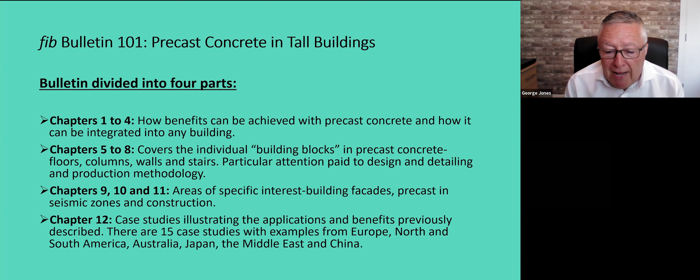There was particular attention to connections in this area, which is often one of the things that people ask about in relation to tall buildings and precast concrete. In chapters 9, 10, and 11, we then looked at areas of specific interest, and those areas that we chose were building facades, precast in seismic zones, and construction of precast concrete in tall buildings. And finally, we finished with 15 case studies, and we tried to draw examples from throughout the world, and we have examples from Europe, North and South America, Australia, Japan, the Middle East, and China.

So going back to the various chapters in the bulletin, chapter 1, we looked at the characteristics of tall buildings. They generally have a small footprint due to the high land values where they're built and the restricted space available. They tend to have a repetitive layout above the lower levels, giving rise to repetition of form and so on. There is an increase in the relative magnitude of lateral loading due to the tallness of the building compared to gravity loads. And there is great importance in vertical service cores for purposes of structural stability, not only for the cores themselves, but the structural stability that lends to the building, and as a fire escape, which is extremely important in tall building design.

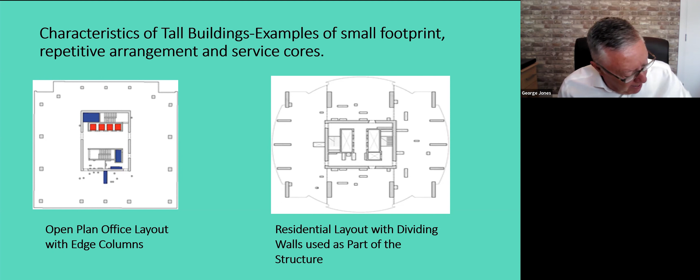On the right-hand side, you can see a typical arrangement of a residential type building where areas that are accommodated by walls and so on can be used as part of the structure.

This gives engineers a challenge in that they need to then develop efficient and innovative structural systems that minimize this cost premium, but also satisfies the building's performance requirements.

Now, what are these essential components? Well, each tall building requires its cores, which take up a large proportion of the floor area and include stairs and landings. They also have floors. They also have other vertical components supporting those floors, columns and walls, and they also have a facade. These are essential components in buildings of this type, and all these components can be provided in precast concrete.

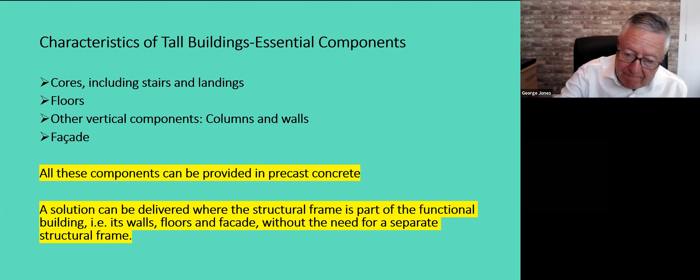Chapter 2 of the bulletin looks at benefits of precast concrete in tall buildings. And we all know that there are great benefits in concrete itself, whether it's precast concrete or in situ cast in place concrete. It has high quality and low maintenance, great fire resistance, strength, temperature control and insulation, acoustic separation, durability, visual flexibility and sustainability. We all know of these properties.

However, in precast concrete, there are extra benefits that can be achieved. These benefits are reduction in floor cycle time. I expect Mischa might talk about that later, where floor cycle time becomes critical in tall building construction. And this is the time taken to construct a single floor and supporting vertical elements. The increased time certainty and improved completion dates. Again, weather, climatic effects, and so on, don't affect precast concrete, which is made off-site.

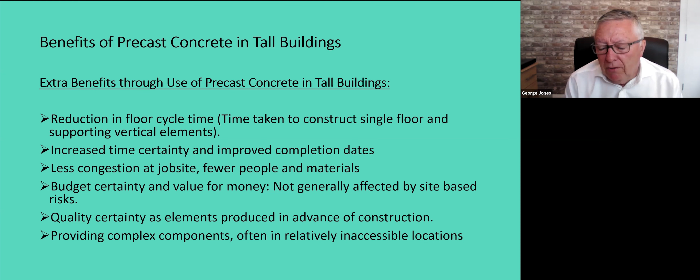There's less congestion at the job site because the concrete is made off-site. Then all you need are a few people to erect the concrete and complete the connections. We should have budget certainty and value for money because the precast concrete is not generally affected by site-based risks. There should be quality certainty as elements are produced in advance of construction. So elements can be inspected and it can be ensured that the quality required in the building is achieved at the factory and not left to be inspected on site after removal of shutters and so on. And complex components can be made off-site, and often there are relatively inaccessible locations at high levels that cause difficulties in cast-in-place concrete.

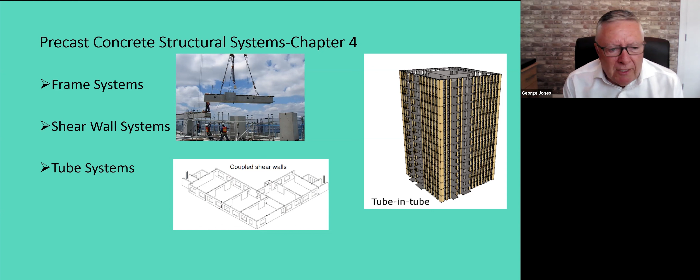In chapter 4, we have precast concrete structural systems. Dick van Keulen will be talking about this in more detail in the next presentation, but generally these can be split into 3 areas: frame systems, shear wall systems, and tube systems.

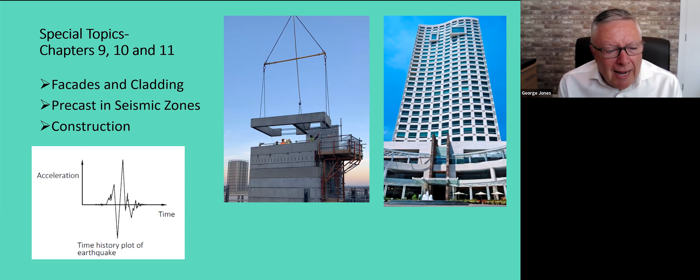The Conjunto Paragon, Mexico, is an award-winning precast facade. Again, in the USA, another precast facade at the Northwestern Memorial Hospital. The Erasmus Medical Center in the Netherlands was a full precast frame with a novel way of constructing that frame, which Mischa will discuss later. The Paramount in the USA, a full precast frame in a seismic zone using post-tension technology with precast elements.

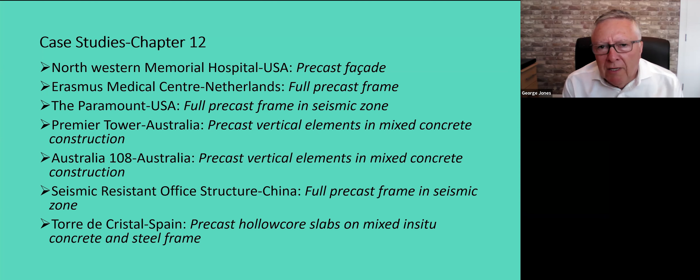So that gives you an introduction and hopefully a flavour for the bulletin itself. We now have 3 specialist presentations, and I would like to hand over to Dick van Keulen, who will talk you through precast concrete frame systems. Thank you.

Thank you, George, for introducing me. My name is Dick van Keulen. I'm from the Netherlands. I'm the founder of an engineering office, and we are specialized in design and engineering of precast concrete building structures. Apart from that, I'm doing research at Delft University in the field of precast concrete.

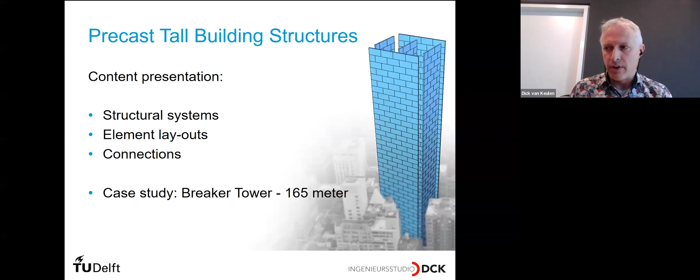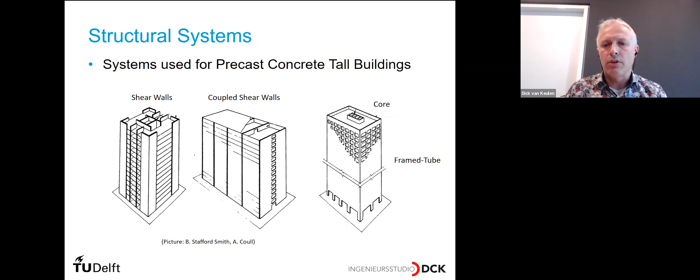When we look at tall buildings, then we have a mixed type of structures, and that are 3D structures. For example, a core with the elevators and stairs, but also the facade is able to be part of the structural system. Here you see a framed tube structure. It has openings, and this frame structure is able to transfer the forces to the foundation of the tall building.

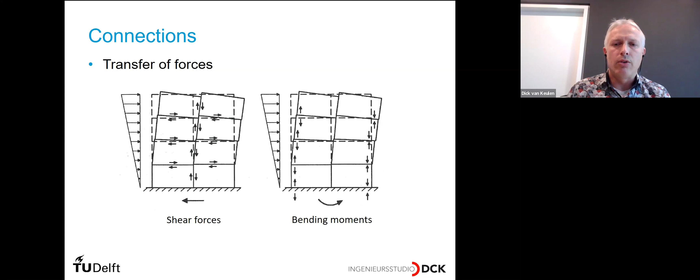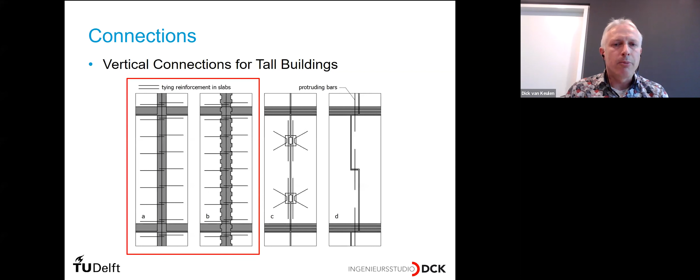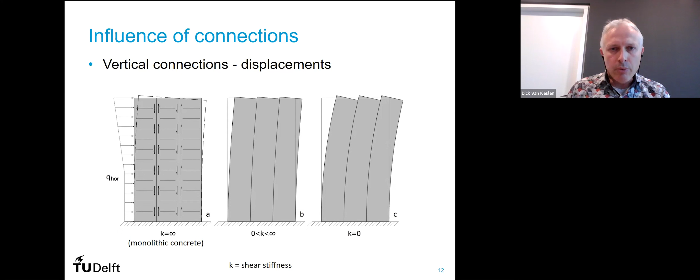And the precast concrete shear wall structure is depicted in the middle. And then the shear stiffness of the connections is in between the infinite shear stiffness and the stiffness of a shear wall without connections. And this has to do with the displacements, which are very important for tall buildings. But what we have as well is the force distribution. And what we see is that the precast concrete vertical connections weaken the shear wall a little bit. But the force distribution also changes a little bit, and the structural engineer has to cover this.

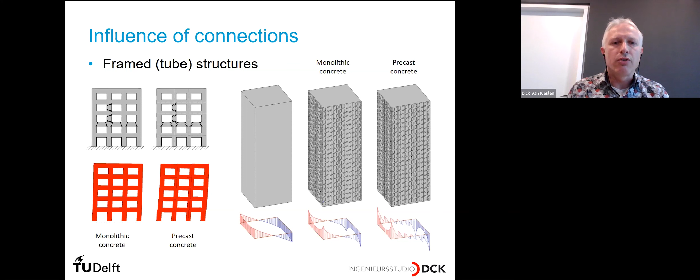I was also asked to present the Breaker Tower in Bahrain. This is the second part of my presentation. This is a 165 meter high precast concrete building. It was completed in 2015, and at that moment it was the tallest fully precast concrete building in the world.

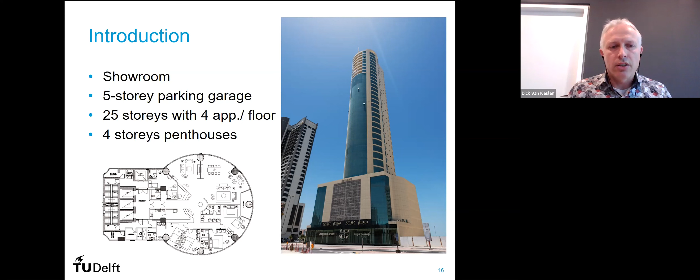This building has a showroom on the ground floor. On top of that there is a parking garage, and in the high-rise part of the building there are apartments and penthouses. And as you can see in the plan of the apartments, they have a very open space, so you have a good outlook to the surroundings. And structurally, the backbone of the tower is situated at the left, at the back of the building.

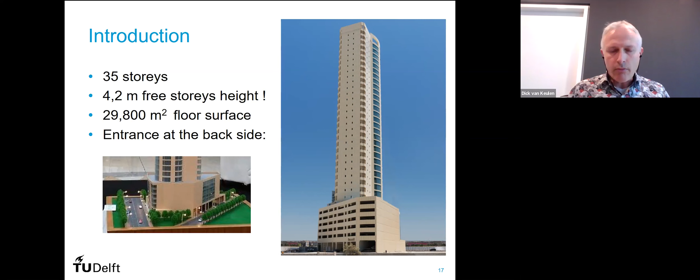This building has 35 stories, and that's not a lot for such a high building, but that's because of the 4.2 meter free story height, which is part of the luxurious environment over there. They give the resident a lot of space. Then I would like to go into the precast concrete components of this building.

At the front side there's an open structure with columns, and between the columns there are inverted T-beams placed, and they used hollow core slabs for making the floor, placed on the T-beams and also on the walls. What you can see here is the round circle. That was difficult to make with hollow core floor, and they chose to apply a cast in situ round shaped cast in place slab. That's what they make there to make the apartments with an overview.

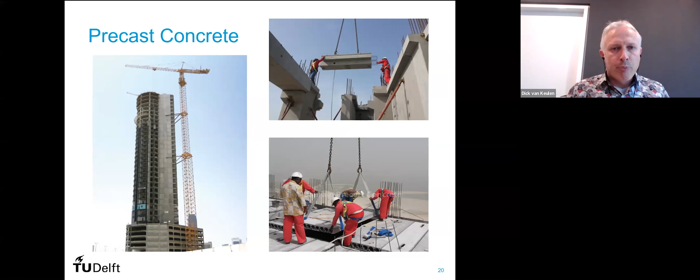On the left side, you see all the walls, and they are all shear walls. They are coupled together. Here are some pictures of this building. In the left one, you see the shear wall at one side of the building. This is the back wall of the building. Here 4 precast concrete elements are connected per floor, connected to one another. They make inner spaces where they put in cast in place concrete in order to connect the 4 wall elements together so that they form the entire shear wall structure.

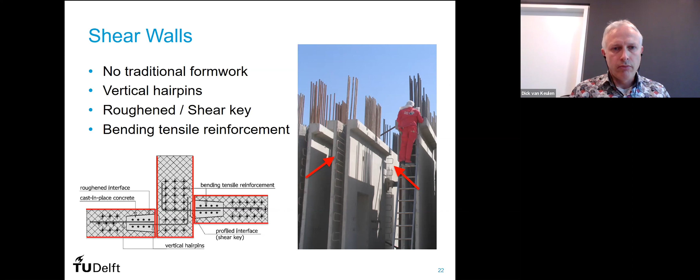It's also important to have a solid diaphragm action. What you can see here is that over the precast concrete wall, there is a cast in situ space where they make the tying reinforcement, and that's available on top of every precast concrete wall element, and together they form a very solid, stiff in plane slab.

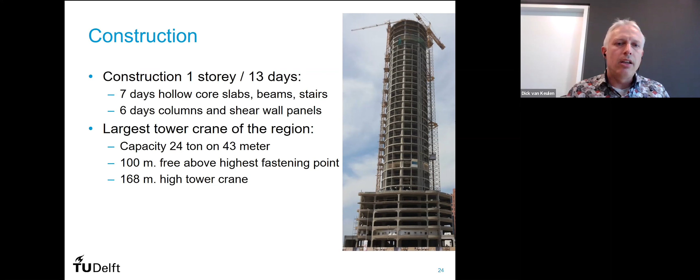Then a few words about construction. The construction took 1 story per 13 days. Of course, they started with more days per story, but at the end they did it very fast, and they needed the largest tower crane of the region. So this was my presentation. Thank you for your attention, and I would like to hand it over to Mischa Falger.

Thank you, Dick, for your introduction into the way of constructing and aspects with that. I'm talking about actual construction of the buildings from a constructor's or contractor's point of view. My aim is, in the limited time I have, to give the audience a little taste of how a contractor looks at a tall precast building. After introducing myself and the company I work for, I also would like to make a link between how you construct a building and what impact that has on the design. And of course, I would like to tell you a little bit more about some of the projects.

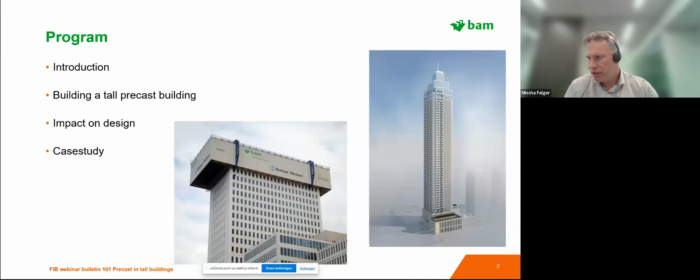In fact, all 3 buildings Dick showed in his first slide are in Rotterdam and are built by the company I work for, which is BAM. BAM is the Netherlands' largest contractor, and also has a strong presence in wider Europe. We are doing projects in 6 or 7 countries on a regular basis, and we are involved not only in building buildings but also in infrastructure and everything which you would expect from a big construction company.

As a person, I'm a structural engineer by education, and I've worked most of my career for BAM as a contractor, but with a structural mindset. And what we try to do in our office is to come up with smart solutions and optimize designs so that BAM is enabled to build those buildings efficiently, and therefore is competitive with other colleague contractors.

When a contractor looks at precast tall buildings, a few things come to mind. Of course, safety. Safety is very important to a construction company. Of course, in precast tall buildings, precast is an important part. The fact that the building is tall is an important thing. Logistics is always something to think about, and time on most projects I've worked on in my career is of the essence. So I'll go into those five aspects in a little more detail.

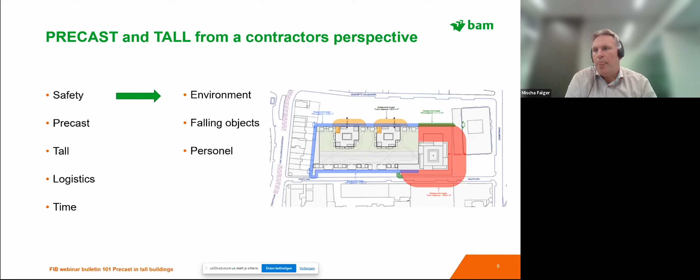The picture shows some safety zones around buildings. The blue one is part of the project, which is less tall. The red one is the increase of safety area you need around tall buildings. So the fact that a building is tall has implications for safety and the way we look at that.

George gave a good example and a good list of reasons why precast is an interesting way of building buildings. As a company, we like precast for several reasons. The quality, as mentioned, is a big part of that wish to build precast. And if we do so, we focus on things like element size and weight, the way connections are designed and need to be applied in the building, and of course also transport of elements and the way they are positioned in the building. Typically, you need to take all those factors into account to come up with a solution which is actually buildable. I will make a reference to that later on in the design part.

But all those aspects of precast are very important to a contractor, because the combination of those factors actually makes a project work or not. And I think that is an important thing to remember when you are a designer. Many times we come across buildings which are very suitable for precast construction with all the benefits that come with that, but are designed as an in situ concrete building. And to make that step, especially for a tall building, from in situ to precast is a big leap, and something a designer really should be focused on.

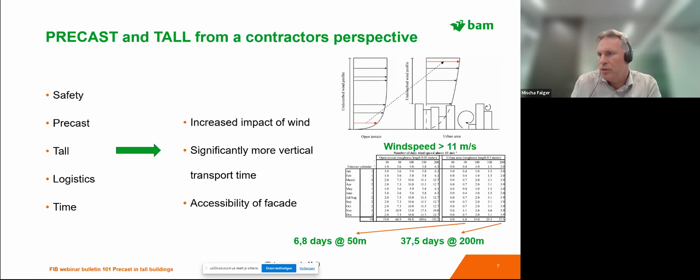From a logistics point of view, high-rise buildings are often located in the city centers of big cities, which almost by definition means that you have a very small building plot, that the access to the building site is limited, and that all the work you have to do, building a very tall building, has to be crammed into a small area. This particularly is of interest to a contractor because that actually means that you have to organize your building sequence and all that sort of things in a completely different way than when you can build the same volume of building over a spread out area.

So from that point of view, the fact that the building is tall and always in the city center is something to keep in mind. And George already mentioned cycle time. The time you need to complete one floor is something which is very important to a contractor, because once you get into a rhythm of precast, you need to make that cycle every week to keep up with the time schedule of the total project.

Well, if you have a building which is tall compared to a regular size building, this vertical transport is getting a big impact on your cycle time. Typically, we try to get a floor done every week. That is something which suits our company and our suppliers and the way of thinking in our country. But you can imagine that if you have to transport an element, let's say a facade element, in a vertical way, using cranes, this takes about 5 minutes up and down for a building which is 50 meters tall. But as soon as you get to the 200-meter limit, you need almost 20 minutes to get it up. Well, that is something which is of significance on this cycle time.

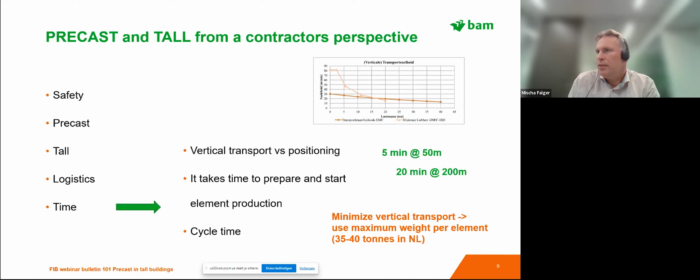Coupling those issues to what you can do or need to take care of when you are designing a building is that element size and weight actually matter. If you are trying to maximize your weight so that you minimize the number of vertical movements, it means that you have to adjust the element size, because at the bottom of a high-rise building, the wall thickness typically is thicker than when you go to the top, which means that the other dimensions of the element at the bottom stories need to be smaller, since you have a fixed weight limit. That is something which has impact on the structural behavior of your building, as Dick illustrated. So from a design point of view, this is something to take into account.

Also, the connections, wet or dry, are very important. Stiffness is a key factor in designing a tall building. And from a contracting point of view, we have preferences for certain types of connections, because some of them are easier to make than others. Take, for instance, welded connections. Typically, because of the internal finish of the building, the designer would like to make those connections on the outside of the structural elements. Well, try and do that with welding equipment at 150-meter height on the outside of the building. That is really something we are looking at. So connections and the way they are made and positions in the building are of significance for the construction sequence.

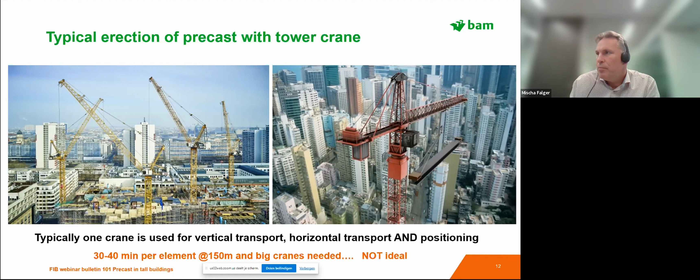In the bulletin, there's a case study about the Erasmus Medical Center, which is a 100-meter office tower with a prismatic floor plan, and I think that's important to be able to use this type of construction method. The building was completed in 2016. And by using this self-climbing assembly hall, we were able to disconnect the vertical transport from the horizontal transport on the site and the positioning of the element, by using two separate cranes for that.

These two are independent, and you only need one crane to get all the material up into the building, and you use the other one for positioning and transporting horizontally. And this usually decreases the impact of the height of the building. The cycle time can be the same as long as your vertical crane is able to get all the elements you need up there as fast as needed.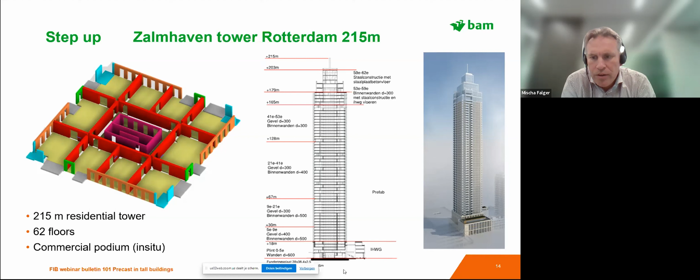And by making this part in situ, you also buy time to start producing the elements you need for the higher floors, because once this self-climbing assembly hall is going at 1 floor per week, you need more elements than the factories can produce in 1 week's time. So they need a head start to start producing the elements, so that once you start using your assembly hall, they can keep up with the demand.

Well, this building has a standard floor plan, which is square. Indicated are the green lines, which are internal walls, and the red lines are parts of the facade, which are actually load bearing and also part of the structural system. In basis, every element in this building is made from precast concrete, except for an in situ floor topping.

And the reason for that is that in our country, the Netherlands, it's quite common to put all services for apartment buildings in the floor. So all the air ducts, all the wastewater treatment, all that sort of installations is in the floor. And it's very impractical and almost impossible to do that at this scale in a fully precast element. And also because it's a very tall tower, there are special requirements for robustness, which are easily met or more easily met by putting on an in situ topping. So basically, half of the floor thickness is precast, and the top half is cast in situ.

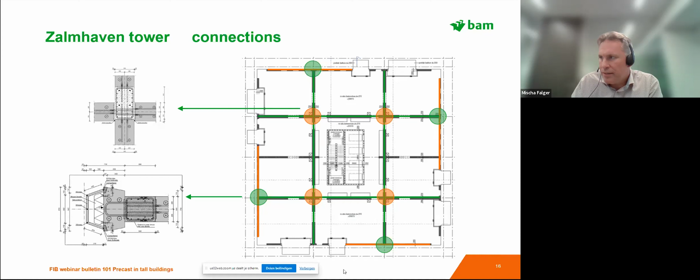And to enable the walls to work together as one structural system, we have different types of connections between internal walls and between the walls and the facades. All those connections are wet and are of the type as described by Dick earlier. But from a construction point of view, it's something we spend a lot of time on, to actually get that right and to get that into the sequence in a correct way.

Well, the end of my presentation is to show you a little bit of what this self-climbing assembly hall actually is. Basically, it's a big factory on top of the building. In that factory hall, there are two big gantry cranes, one for getting the elements from street level up to the level you're constructing, and the other one is for picking up that element and transporting it horizontally and positioning it at the right position in the building.

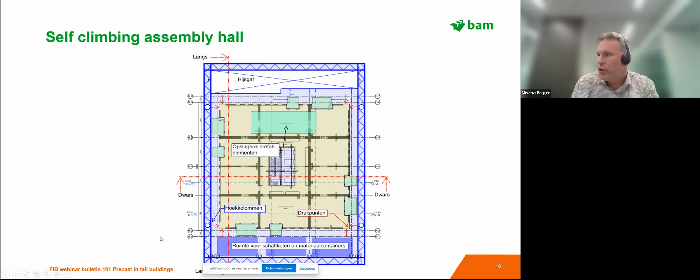If you look at this plan, there's a big hole in the assembly hall which enables the elements to come up. There's a position in the middle, which is a position where we can store elements that are to be placed later on. The whole factory has also containers and amenities and all that sort of things for the people working in this hall, so that they don't have to go down during the working day. In itself, it's almost a factory when you look at it.

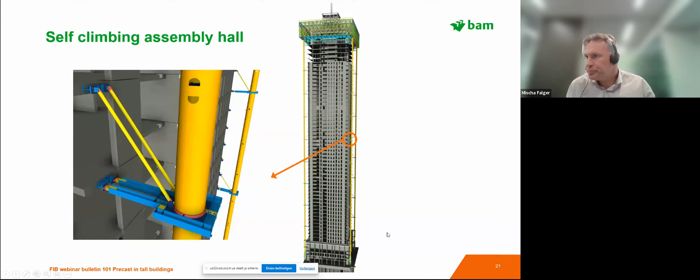And since pictures can say more than words, I would like to end this presentation with two time-lapse videos. The first one is about jacking the system, because every floor you have to push up your assembly hall by one floor, and that is done at ground floor level, so that everything is at an easily accessible point. And the second time-lapse video actually shows a one week cycle of constructing one floor.

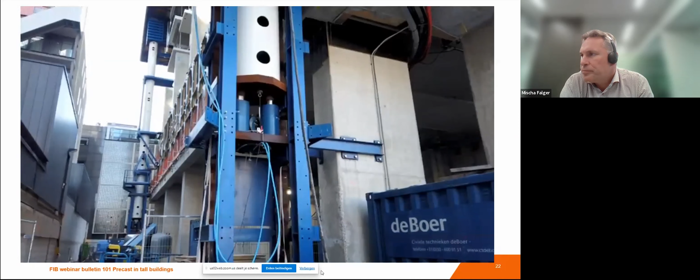Once the system has been pushed up one entire floor, the white legs are supported by the blue support structure. The jacks go down, and we insert a new white element, a new tube, and then you can do the whole exercise again for the next floor. And well, this time lapse gives you an idea of one cycle, how we complete one floor. In total, 82 concrete elements are installed within that one week, 5 days of work of an average of 10 hours per day.

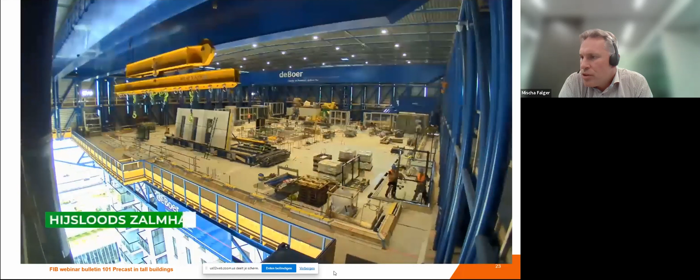You can see the elements come up on the left-hand side of this picture. They are positioned in the storage area until the second crane can lift them up and position them in the right position. You can also imagine that it's impossible here to switch that sequence, because there's no room to actually take elements across other elements which are already in place.

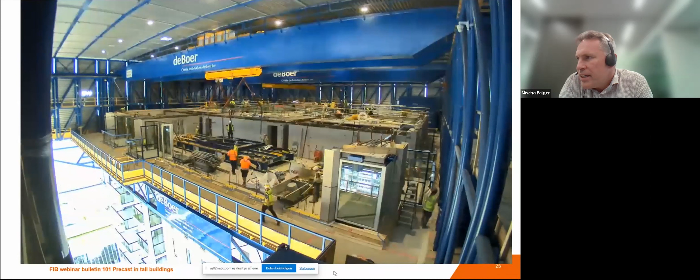And in this way, in 42 months, we have constructed the tallest precast building in the world currently.

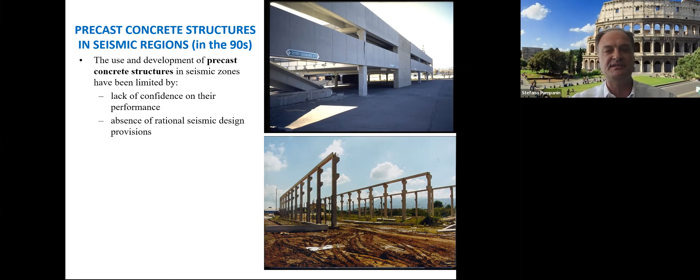It's not a problem of the material, it's a problem of connection design, a problem of conceptual design, and generally speaking, a problem of lack of rational seismic design provisions. You do not have a code. You don't learn precast, pre-stress and post-tensioning at school, at university, so you are in trouble. So in the 1990s, precast in seismic regions was adopted, but with quite major restrictions.

The restrictions were: you could use an emulation or cast-in-place approach, the famous wet connections, or you could use strong connections, provided that the inelastic demand due to the earthquake was not accommodated within the connection between precast elements. The novelty became, after the 90s, this jointed, dry, ductile connection. That's what we want to discuss in these very few minutes.

It's not anymore an issue of life safety. If we're thinking about seismic design, we are obviously targeting life safety, but it's not enough. If you take an industrial building, the cost of the contents, like the Parmesan cheese in Italy in 2012 damaged by the earthquake in some industrial plants, was much more than a few times the cost of the skeleton of the building. Obviously, if you get a full collapse, we're talking about a different issue, but we should be able to design for no collapse or low probability of collapse, and life safety.

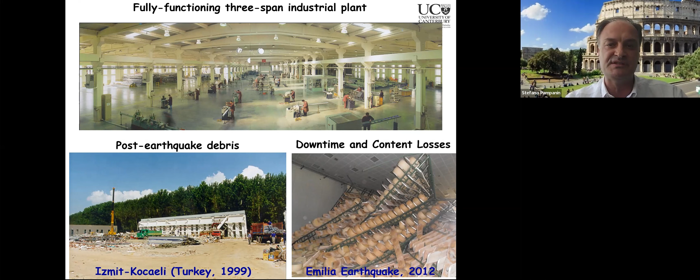The interruption of the production of such 24/7 industrial plants is going to be, in a few weeks, much more expensive than the whole structure itself. So we need to change gear. What are the key parameters or key aspects in seismic design of precast?

They're not that different from other structural materials, but they are more important because you don't have the opportunity to go on site and fix. But this lack of opportunity to go on site and fix is actually what George was very properly saying is a benefit, a lack of surprises, or let's say in a different way, lack of risk on site, because things should go as right as they can, from quality-controlled manufacturing to delivery on site to the erection. And Mischa was showing how extremely high technology can be adopted to develop the full system.

So we need a conceptual design. We need to discuss very properly what is the lateral resistance system. We need then to think about the design methodology, force-based versus displacement-based. I can tell you right away, it's time, even for very tall buildings, to consider seriously using displacement-based design, possibly in combination with force-based design. But we need, first of all, to limit the drift. We need, first of all, to limit the displacement. And it's much easier if we start from the beginning from a displacement-based design point of view, even in a low seismic region, or even in a wind-governed type of design.

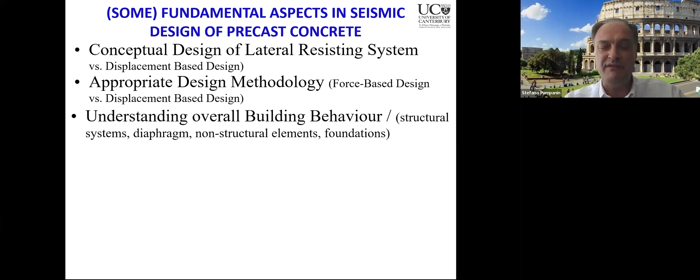We have to understand the overall building behavior, which means structural system, diaphragm, non-structural elements, foundation, or the whole building blocks that you will find in the bulletin, which is going to discuss these issues or systems, but we need to make it work properly all together, which means displacement compatibility. The precast stairs need to be able to slide as part of an isolated component, like in a base isolated building. The diaphragm needs to do a proper job. The taller you are, the more higher modes you're going to introduce. So you need to be very careful in designing and detailing, here it is, detailing the connections between elements and the connection between the skeleton and the non-structural system.

Redundancy and robustness are extremely important. With the same care that we think about preventing progressive collapse during construction, we should be preventing progressive collapse in the seismic response, so in the seismic zone during an earthquake, in the aftermath of an earthquake. So it's fundamental that the structural designer considers redundancy from the beginning and robustness from the beginning of the design.

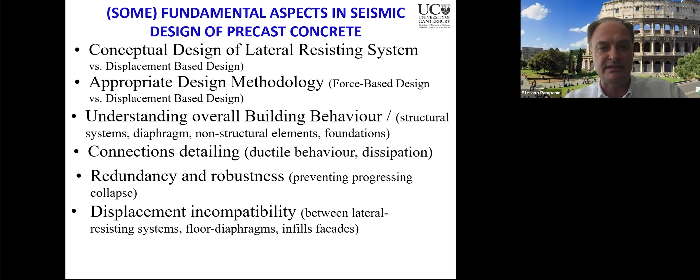Incompatibility of displacement: someone doing something, someone else doing something else. Think about a tube-in-tube, a dual system with core walls and frames, or core walls and outrigger, or outer walls and core walls and outrigger, using tension and compression to try to give you more balance. The whole incompatibility of deformation between one system and the other, between the floor diaphragm and the lateral resistance system, must be taken into account. Last but first, detailing.

Devil is in the detail. In any structural design, we should not forget that detailing is going to be the one saving the building, especially when we're thinking about seismic design. It's not the colorful type of output that you get from your computer model. So let's use the computer model as an assistant, but the conceptual design is the one that, from the very beginning, is going to drive the proper design in the proper direction, and detailing is the one that is going to confirm the proper conceptual design in terms of behavior. Our computer model should be a verification.

So the idea of, you see here, I didn't put design methodology first. You don't get started with try and see. So it's not a design by analysis, but it's a design as a conceptual design, and then the verification comes with the analysis. We will not be talking about this type of buildings.

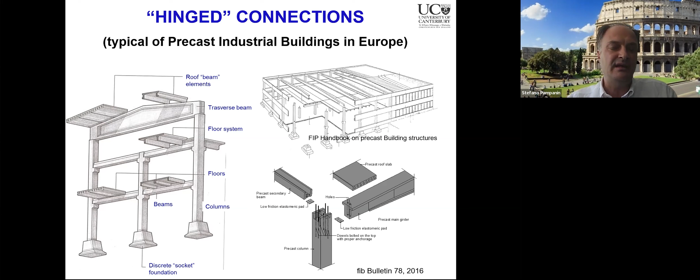There is a prejudice. People think that precast concrete, especially in Europe, is for industrial buildings with this sort of strange connection, simply supported beams on columns, with big corbels, maybe a couple of dowels, socket foundation at the base, and everything which is very far away from a moment-resisting connection. If we are talking about precast construction around, not the world, but just going northern in Europe, central north of Europe, you saw what precast concrete is actually capable of doing, and it is far away from simply supported or hinge type of connection. We do need, for seismic design, moment-resisting connection.

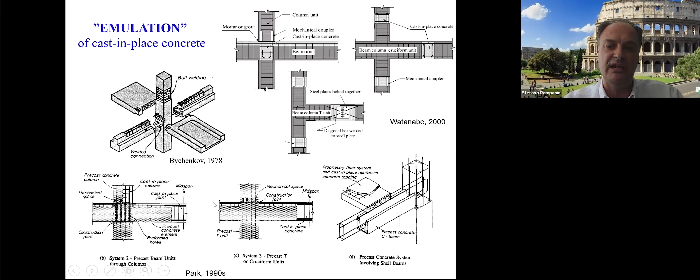So in the past, moment-resisting connection, and in the present, is well developed using wet connection. You have semi-precast elements which are going to be connected in a monolithic emulative way by casting the wet connection. You can have cruciform joints, you can have T-shaped joints, you can have shell beams, and you can find more information in the fib Bulletin 78, which has been led by a great engineer and academic and friend of all of us, Spiros Tsoukantas, who is not with us anymore, passionate about precast. He pushed very hard for this bulletin to be able to be completed. And you can find there some basics of step-up construction, of emulative approach, as well as the dry approaches that we are going to refer to, with shell units and so forth.

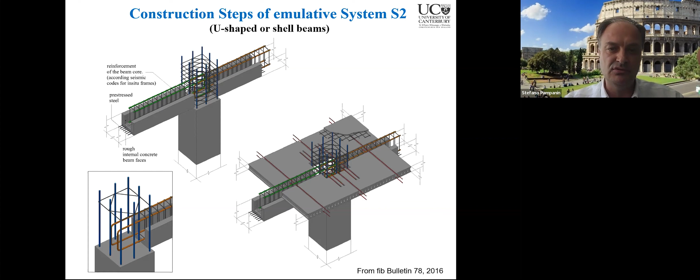All of this, just to make sure, can be properly done for tall buildings in seismic regions. But there's a but. There are examples from India, there are examples from Japan, there are examples here from New Zealand with cruciform joints. But if you're doing semi-precast, so if we are half precasting, half casting the connection, we are not exploiting the advantage of precast concrete. It has been mentioned very clearly, if you want to go fast and quick, if you want to have full control of the quality of the manufacturing, you want to do all the job in the yard, all the job on your desktop, on your computer, and the construction should be as simple as possible.

It could be complicated from the point of view of tallness, could be complicated from the point of view of speed of erection with dry elements, but you don't want to increase the complexity of the connection as you're typically doing with semi-precasting. So what I just showed to you is absolutely usable for tall buildings in seismic regions, but we are going to a new era. The new era is saying that in seismic areas, we don't want to have damage. We want to have life safety, but we don't want to have damage. We want to have damage control. How can you get ductility without having damage?

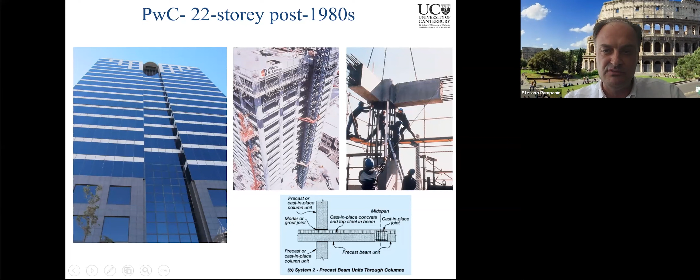And an example of the good old way is this 22-story building. PwC, PricewaterhouseCoopers, is a 22-story building using a cast-in-place emulative approach in New Zealand. It got hit by the earthquake in 2010-11, specifically on the 22nd of February 2011, and it showed an amazing plastic hinge, the best ever seen plastic hinge in a beam. The joint and the column are well protected by capacity design, so you are going to have the weakest link of the chain in the beam, but we don't know how to repair it.

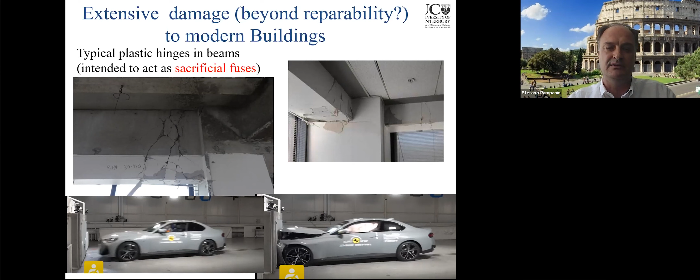In a way, I just gave a presentation in the Senate, in the Italian Senate, explaining what it means, the next generation of seismic protection, and explained that what you see here in terms of plastic hinge in a beam is what you see in a car, exactly what we are accepting or expecting from a car, to plasticize itself to protect the pilot, to provide life safety. So the building does deliver life safety using an emulative connection, by plasticizing the beams versus the column, but at the end of the day, we don't know how to repair it.

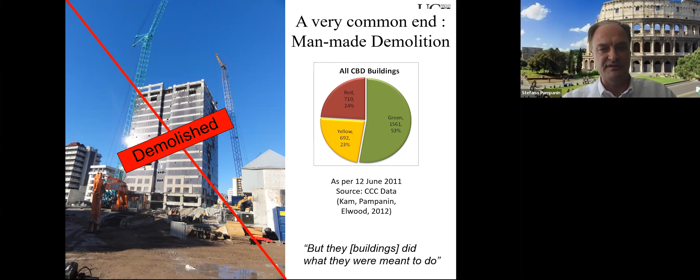So a big issue in terms of resilience, community resilience, and sustainability of a city is this. That's the picture of Christchurch, the city in New Zealand, which was hit by a sequence of events in 2010-11, and the reconstruction of the city had to become safer and, let's say, more resilient. Number of fatalities, 185, a lot.

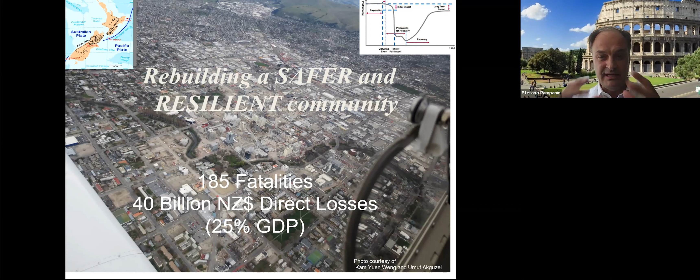As has been said, that could have been worse, could have been thousands. But the cost, 25% of the GDP, gross domestic product, was the cost of the direct repairing of the buildings themselves, without even considering the downtime and everything else.

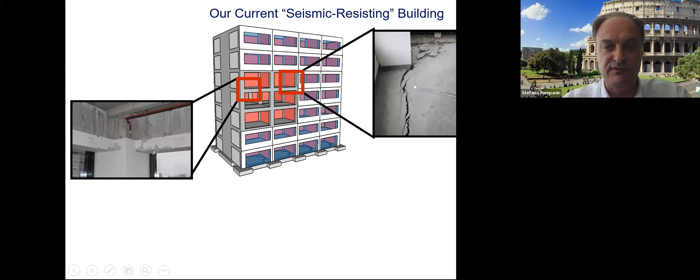So our emulative approach will deliver a beautiful skeleton which will have a plastic hinge which cannot be repaired, will deliver a frame system which is going to push the floor. The floor is not going to be rigid because we decide that. The floor is going to be pushed by the plastic hinge and is going to be damaged. All the non-structural elements are going to be compromised regardless of the structural skeleton, and a precast facade can kill. So that's what we deliver so far today with the seismic resistance system coming from the code practice.

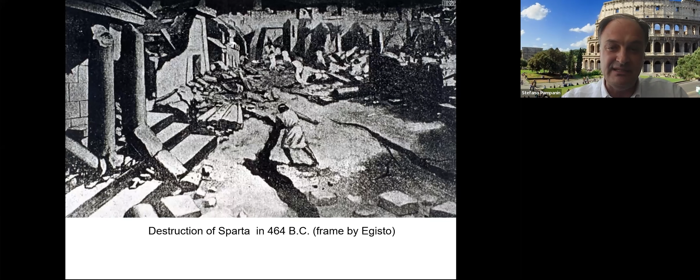Be careful, it is the minimum by law, it is not the target. So we want to do better, and if we want to do better, let's see what has been done in the past. We go back to the ancients, and they had earthquakes before we invented earthquakes. So they knew what was coming, or better, they knew that it was coming, they had to find a way, and one of the ways that they found was rocking, putting marble, unreinforced precast concrete, if you wish, beautiful blocks on top of each other.

And what they did, in the Greek way, in the Roman way, the Fori Romani just nearby where I am, and I have behind me an example of that sort of seismic resistance system, which is the Colosseum. This is the ancient Agora temple, the Doric temple in Athens, in the lower Agora, so not the top Acropolis. And the way to solve the problem of seismic resistance was to rock. So here it is, 2,500 years later, a new way to take seismic resistance into account, achieving low damage instead of only life safety.

We have to go back to the 1990s. So from 2,500 years ago, we go back to only 24 years ago, and we get to the PRESSS program, Precast Seismic Structural System, in the United States, which PCI, also endorsing this bulletin, had basically the courage to invest in a new technology to try to go properly high in a seismic region. And Professor Nigel Priestley, that Priestley of Park and Paulay, the capacity design gurus in New Zealand, was the chairman of that research program, which delivered at the end a 5-story building test, which could not be damaged, in the form of precast frames as well as precast walls.

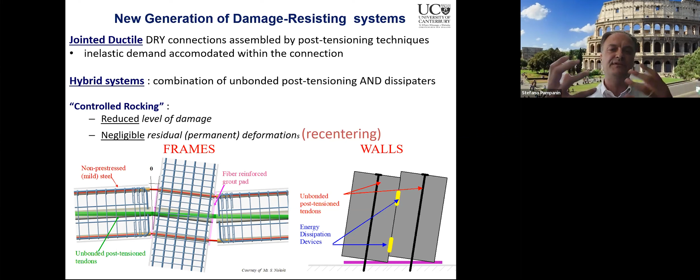So what you have seen so far in terms of stitching horizontally, stitching vertically, can be done with proper grouted sleeves or dissipator type of connection between the precast elements. It's all about deciding the size. It's all about choosing what type of lateral resistance or stiffness you want to have. At the end of the day, you deliver a dry, ductile connection using post-tensioning horizontally, unbonded post-tensioning, so that you have a spring back, and using vertical post-tensioning between walls. So think about all your examples of the tall buildings that you've seen. You could have different types of connection vertically and horizontally, which could partially or totally use post-tensioning.

What is the result? Instead of getting that plastic hinge by moving back and forth and creating damage, as in the car, where you need to create damage to protect the pilots, you're going to just rock as the old temples were doing. And this rocking is controlled by a post-tension tie. So you're not able to go out of plane or, let's say, collapse by large deformation, by P-delta effects, but you're going to be kept in place by the post-tension, and you're going to dissipate. So it's a different way.

In the 1950s, in 1950s construction, we were unfortunately thinking that a soft story was the inevitable way of behaving in an earthquake. We are still having plenty of these buildings which in future earthquakes are going to behave like that. So let's call it the pre-70. Post-capacity design, the new way of doing was to save the building, so protect, save the people.

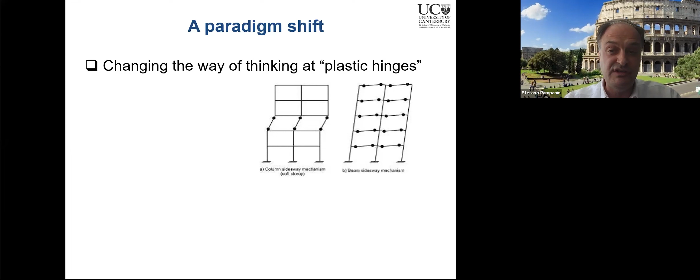Life safety, save the people and protect the people, but not yet saving the building. And now the new way is to protect also the building, so our investments. We have been developing a lot of this type of technology in the form of rocking with internal rebars, as you would be doing it with a grouted type of sleeves, with an injection of mortar, or by moving out in a sort of external replaceable dissipator, we call them plug and play, moving out the reinforcements, such that after an earthquake, you can actually go and check how they are and try as much as possible to replace them if need be, and go for the next aftershock.

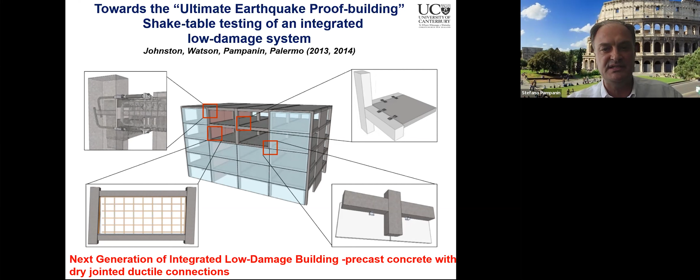So we are moving into a completely different, as I said, era. In the new generation of buildings, we want to have a structural scheme as well as a facade, as well as the non-structural elements fully protected. And just to show you how it works, the new Greek temple, this is an example of a shaking table test that we did in Canterbury almost 10 years ago.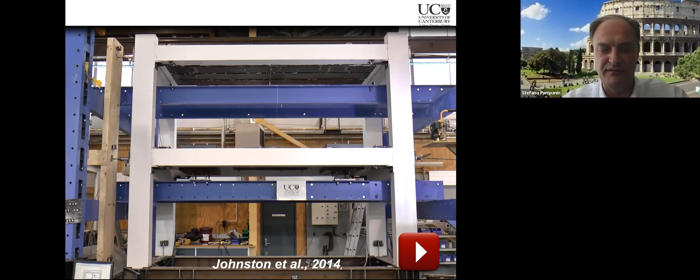Okay, excellent. So post-tensioning, just imagine, go for the height. Columns all the way up, beams post-tensioning. So basically you can go as tall as you wish, and I will show you some example of feasibility study that we've done. But the best example is the 39-story building in San Francisco, which was not using as yet the plug and play. The rocking of the temple.

It's the new marble, if you wish, new reinforced concrete blocks, which, instead of forming a plastic hinge, is actually rocking back and forth. So it's a much easier way to behave in a seismic response without producing damage. You have a jointed ductile connection, which is leading to, we can't say no damage, low damage. When you go to the end, there you are.

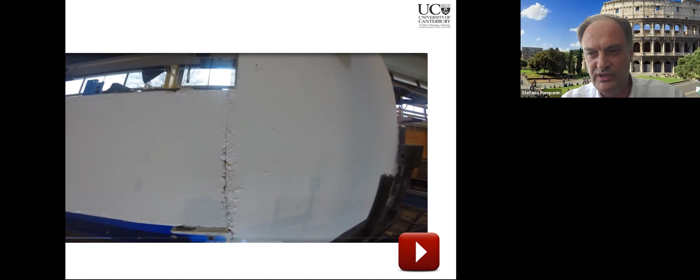And there are ways of producing facades with detailing. The precast facades are themselves heavy, obviously. People think that they are dangerous. It's about the detailing. Look at the connection over here. There is something behind which is allowing the movement. You're going to have the movement. So basically, the more you move, the less you move.

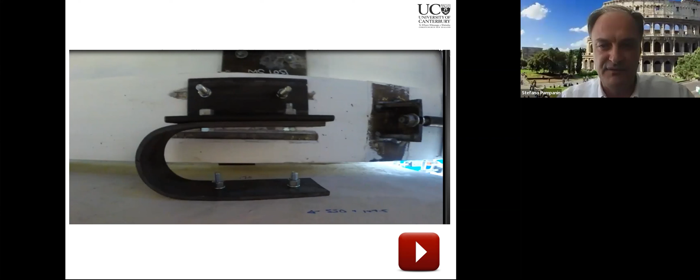So there are very important ways to make seismic design of precast concrete tall buildings as safe as, literally as safe as. And this is one of the connection detailing where we're using U-shaped flexural plates underneath. This is underneath the beam. You see the facades are relatively moving compared to the beam. And so in this relative movement, think about your skin, you're able to move your skin, but you're not breaking anything between the skin itself and the skeleton. And that's what we are able to deliver today.

Stefano, just a word there, we can't actually see the video. Well, we can see the video, but it's not moving. Oh, and before you were able to see the video? Yeah, we can see the video itself, but it's static. Okay. Sorry for that. We need to do it in a different way. I go to the end and maybe we're using it during the question time.

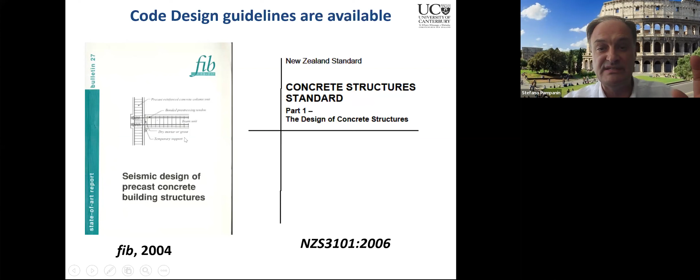Now, I told you that I would have liked to give you a roadmap. Where can you find design code or guidelines about this type of approach? You go back to the FIB Bulletin 27. We are in 2004, and it's a joint venture in terms of chairmanship between Robert Park, Bob Park, and Fumio Watanabe-sensei from Japan, with an international committee I had the pleasure to be part of and to contribute to this, specifically to the chapter of the jointed ductile connection.

Then you can find a design handbook produced in New Zealand as part of the New Zealand Concrete Society endeavor to try to develop a new building system. You can apply the same displacement-based design for tall buildings with all the connection. And then FIB has pushed a lot, starting from the 78 bulletin I mentioned. So Spiros Tsoukantas chairing the committee with detailing precast concrete buildings in seismic areas, practical aspects.

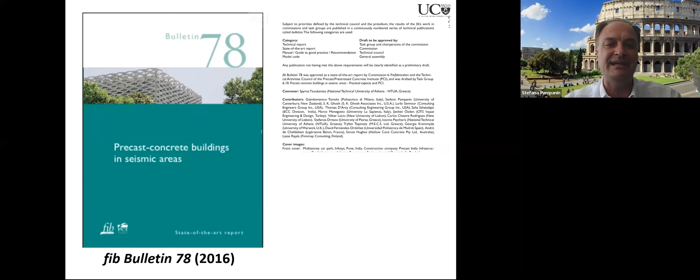And then the one that you've seen, which we're presenting over here, led by George Jones, precast concrete in tall buildings, where we are not showing the full design approach, but we are showing that techniques and technology can be used. Please refer to Bulletin 27, 2004, or Bulletin 78, and so forth.

Also, I'd like to mention the sustainability of precast concrete, which is still part of Commission 6. David Fernandez, now Secretariat of the FIB, was chairing this committee, and now Albert de la Fuente from Barcelona is continuing the effort. And the idea is to show if and how precast concrete, if well designed, can actually deliver sustainability.

And I already mentioned to you, from theory to practice, a 39-story building in San Francisco. In Italy, we have buildings where, if you are not in a seismic region, you can use the same Formula 1 technology to go for longer spans. So don't be worried if you're in Brazil, you can use this technology for longer spans. You're just taking the power, instead of being power for lateral loading, it becomes power for gravity loading.

Argentina, Costa Rica, New Zealand with exterior parallel plate. These buildings got hit by an earthquake. You see the vertical stitch, which in this case between rocking panels is actually made with a steel plate, which is going to plasticize and dissipate energy. It's a U-shaped flexural plate. This went through the earthquake in 2011, and there was basically no damage.

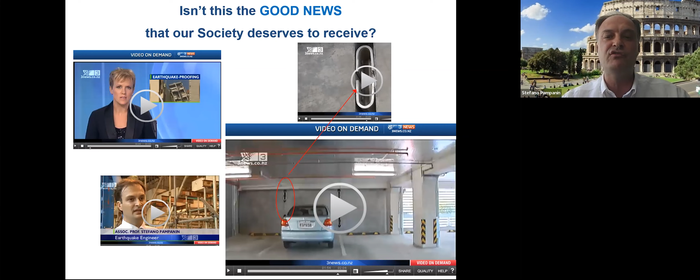So it went onto the media. People were saying how it could happen, how much it would have cost to make it happen. And I can tell you the answer is it cost less. New technology, properly designed, properly delivered, properly constructed, is going to be costing less than the traditional cast in situ wet connection way. So Christchurch 2050, the vision is to rebuild a city with new technology,

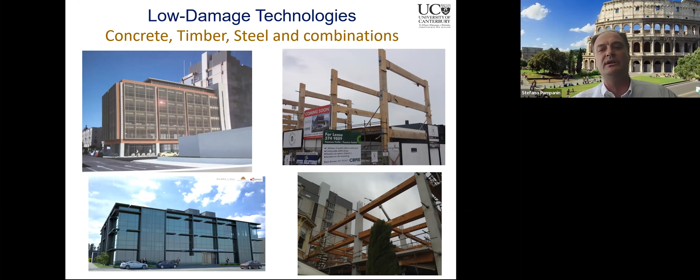and this new technology from concrete has been literally taken up by the timber industry. We developed the PRESSS-Lam, the pre-stressed laminated technology. It's been taken up also a little bit by the steel industry, but more importantly, there is a combination of materials, which is eventually what we could think about doing in the future. It's not only about going for precast concrete, although we are now having a seminar for FIB. We definitely want to promote precast concrete because it's important. But think about a timber building, which is going to be happening no matter what, and is going to be missing power in the column. You're going to use precast concrete columns, which is exactly what we've been doing in this project.

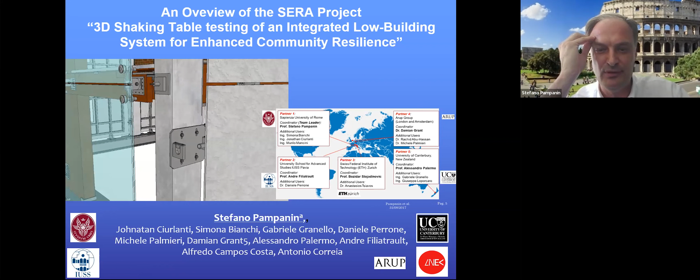I'm pleased to show you just quickly a result of a European project, which we managed to be awarded, working with a top team, including amongst everyone else, Arup from Amsterdam, Arup London, and we have a few people that are listening from here, Michele Palmieri, director in Amsterdam, associate actually, and Jonathan Ciurlanti, former PhD and at the University of Sapienza, and now structural engineering over there. Simona Bianchi from Delft now, Sapienza postdoc, PhD postdoc, and now at University of Delft, working on multi-performance of this sort of a system. So think about the whole building system, and I'm going to show you the video

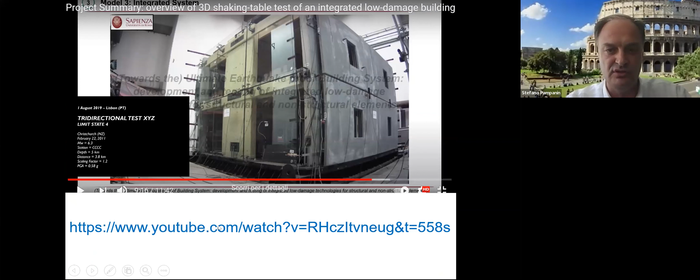and then it's done. You take a huge earthquake. It's a level of earthquake in New Zealand, which was the 22nd of February 2011, in the three directions. We managed to construct the building, which is using precast facades, precast columns, timber beams and timber walls, fiber curtains, fiber gypsum, and glazing. We were not able to damage. The damage was minimal. I can't say there was no damage, but under an earthquake which was meant to collapse the building, we were able to repeat over and over the tests on the building.

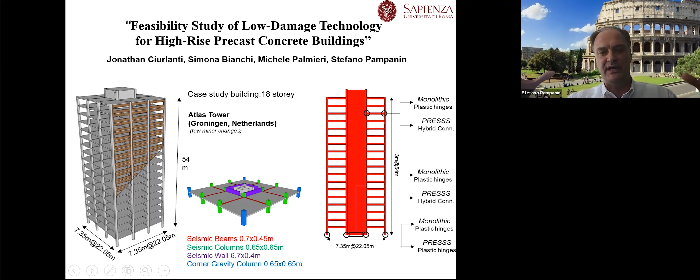A few slides about the feasibility. We've been working for a few years. The first application of this feasibility study was with, I already mentioned the people, Michele Palmieri. In 2011, we published a paper about feasibility of tall buildings. We were looking at a building from Japan, Takenaka Corporation, a 40-story building. Now here we're looking at, with Jonathan Ciurlanti, Simona Bianchi, and Michele Palmieri, an 18-story building in Groningen. So it's a redesign using this type of connection of a building which itself has a core wall and frames, so it's a dual system. And going right away to the dynamic response analysis, so the earthquake type of analysis, the red is the cast in situ or emulative.

The green is the precast jointed ductile connection, and analytical, forget about that for the time being. Basically, you can deliver the same response from a movement point of view: acceleration, displacement, drifts. But the most important part is, at the end of the day, the recentering system, which will potentially come back. And so you will have no residual damage or residual deformation.

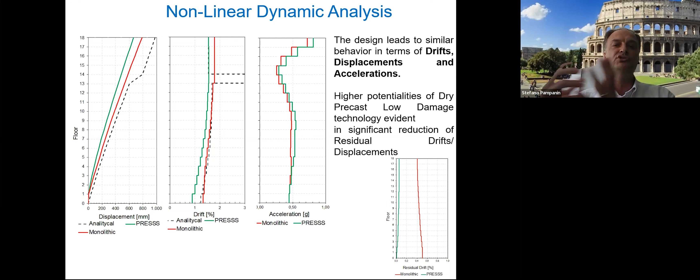In addition, the plastic hinge will be forming using the capacity design approach in the monolithic wet or wet emulative connection system, while in the rocking Greek temple, you don't have damage in the connection. So if we're looking at losses, this is a little bit of a complicated scheme, but look at the numbers, and I know that it's going to be recorded, so you will have the time to zoom and stay.

The cost of repairing, which then means downtime, that means socio-economical issues, of a low damage precast connection, which is going to cost you less to be constructed in a dry way, is going to be the cost of repairing and the downtime much, much less than an equivalent cast in situ wet connection type of building system. So there is basically a no-brainer.

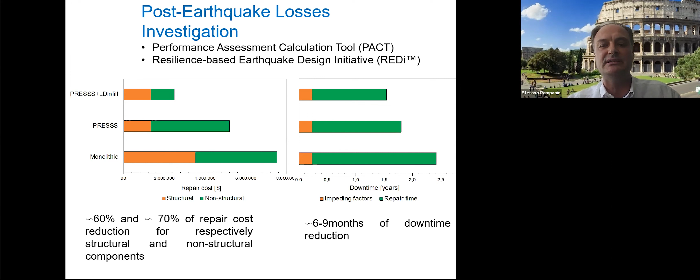And if you specifically go also to look at not only the losses, but also the numbers of downtime, there are ways of doing it with the PACT software from the States. You can approximately calculate the reduction of downtime that you're going to receive, which means if you're using a low damage technology in precast, fully dry connections, you're able to get advantage, not only from the initial cost point of view, but also from the repairing cost and from the downtime.

I'm done. I like always to show, I do not have enough time, just to show and mention the hundreds of people who have been working over the years on this type of topics to raise the bar in seismic resilience, in seismic safety, and now in loss reduction to enhance the community behavior and resilience.